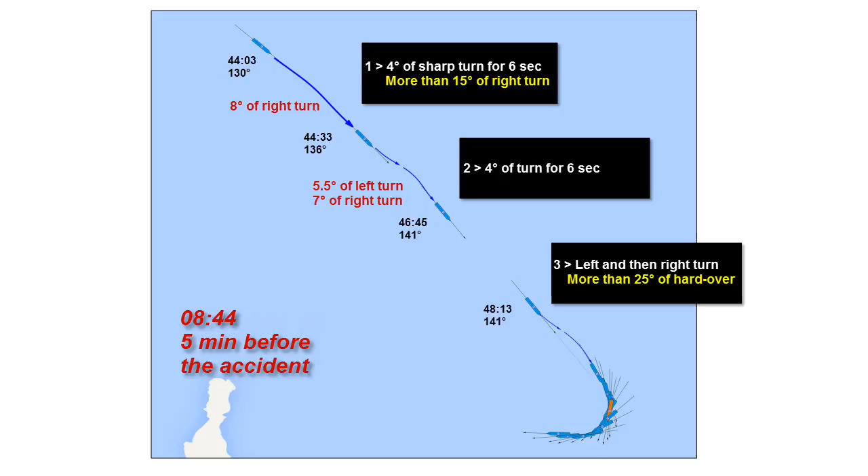For easy understanding, this picture may be expressed in another kind of picture. This is a new expression of the previous picture. As shown, Sewol Ferry turned 3 times, including the largest turn at the last. What's important in this picture is that, according to the HDG, the angles were stepwise changed as shown, but, according to the COG, the angles were sharply changed as shown.

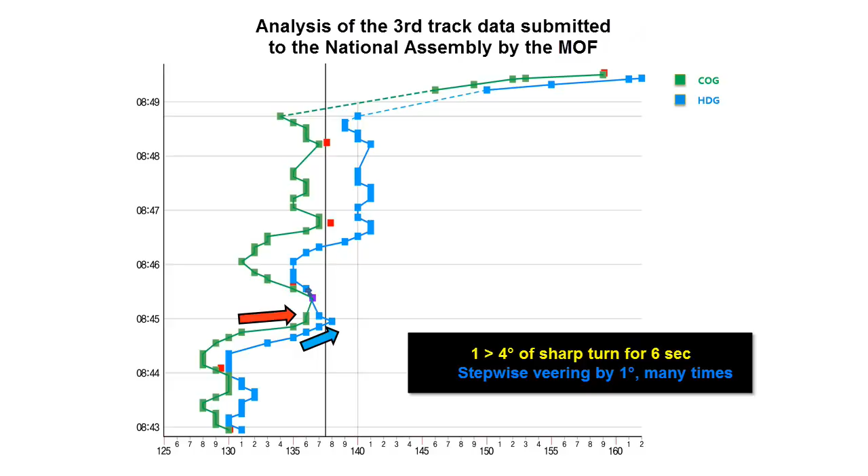The data was verified based on angles until now. However, from now on, the data will be verified based on positions. According to the data reported by the government, not only the positions of Sewol Ferry but also the time, speeds, and COG may be identified. That is, it's possible to know the duration, direction, and speed of sailing.

In the picture, white circles show expected positions of Sewol Ferry obtained by the aforesaid method. The ships in the upper part and lower part show the positions where foreign AIS information is consistent with the government's AIS information. Foreign AIS information is not dense. Therefore, I had no way but to trust the government's data, and I wanted to verify the government's data.

Yellow arrow means the section where veering was done by 4 degrees for 6 seconds. Such angle change requires veering the helm by 15 degrees at least. Blue circles mean the positions reported by the MOF. Before the sudden angle change, the positions reported by the MOF are almost the same as the expected positions, within GPS error allowance. And then, an expected position in the sharp turn section is omitted.

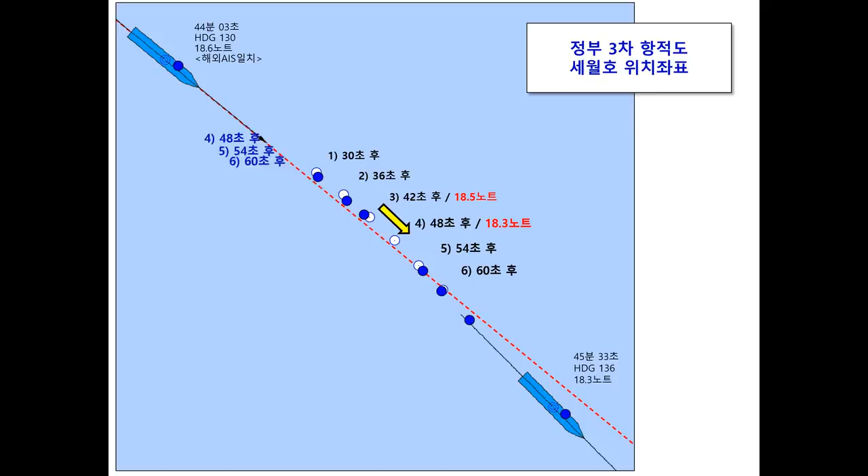As shown, 3 successive positions are concurrently shifted downward. As the result, she had to sail 134 meters between positions 3 and 4 in 6 seconds and had to sail 226 meters between position 6 and the lower ship position in 30 seconds.

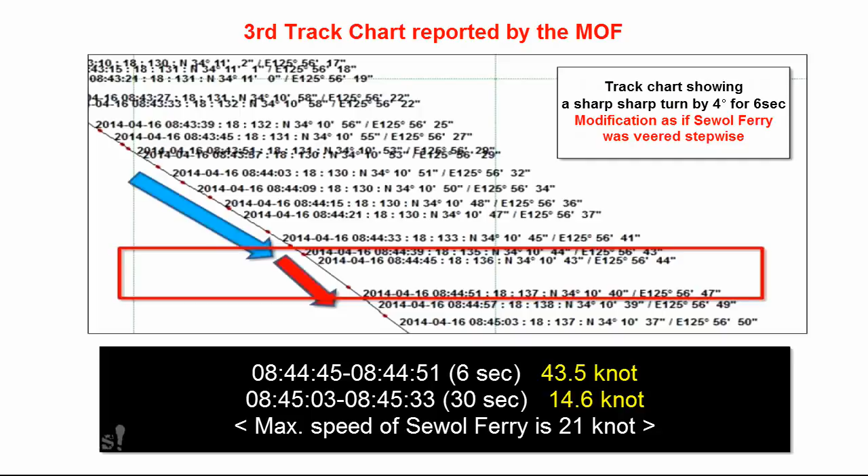As shown, the maximum speed of Sewol Ferry was 21 knots, but she showed a miracle speed of 43.5 knots and then a speed of 14.6 knots. In fact, it's impossible to reduce the speed from 43.5 knots to 14.6 knots in such a short time.

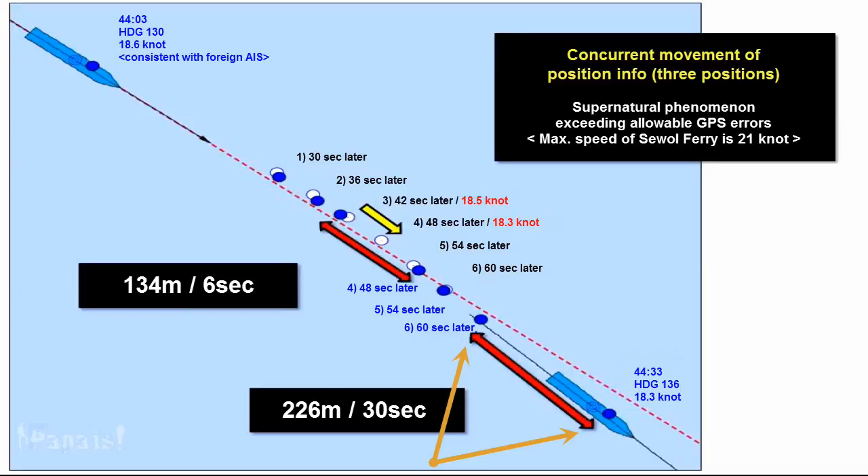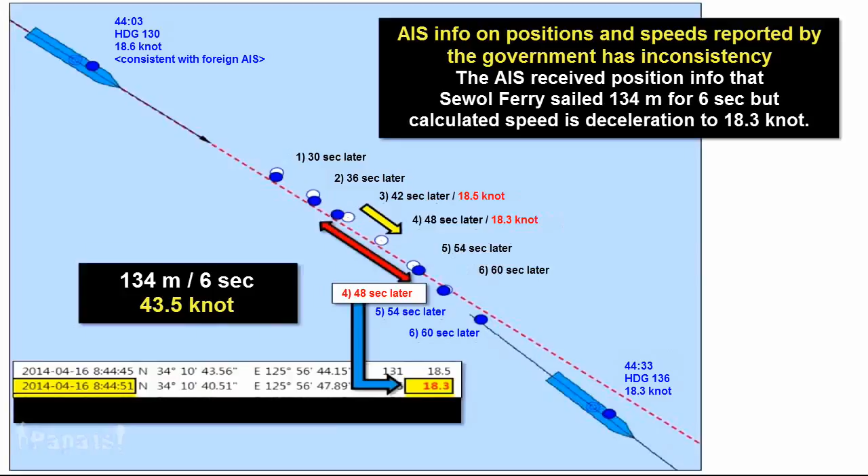As the 3 positions were concurrently shifted, the distance of this section is increased but the distance of this section is reduced. As shown, when such 3 positions are shifted downward, the distance is increased and the sharp turn becomes smooth. As AIS has no ability to consider abnormal information, it has no way but to generate an irrational speed to meet such information. This irrational speed is not related to GPS errors.

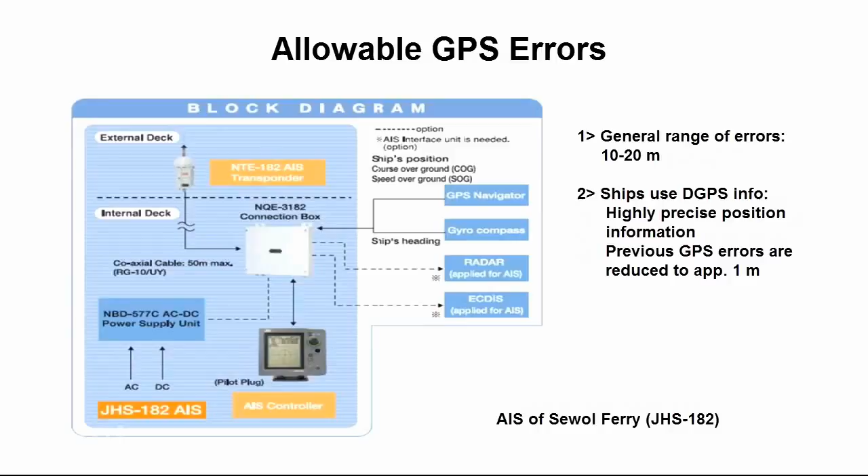When considering the track of UPLI, satellites were transmitting proper GPS data to UPLI. Furthermore, in the case of a ship, GPS errors cannot be so large. GPS errors of a ship do not exceed 1 meter.

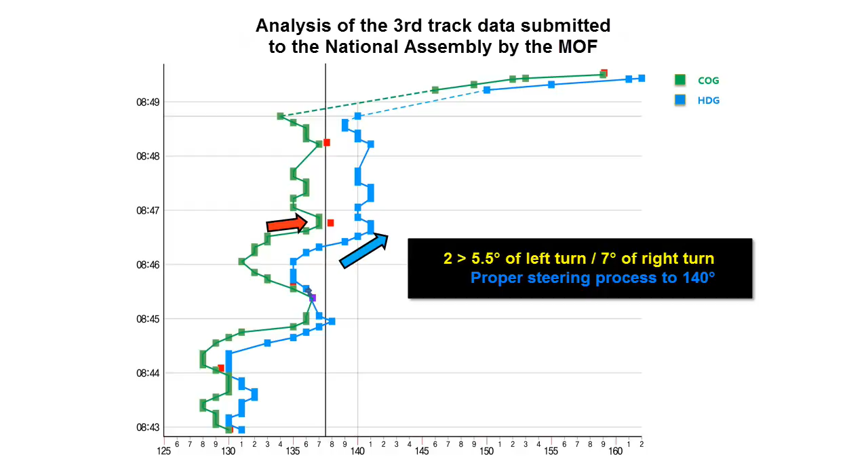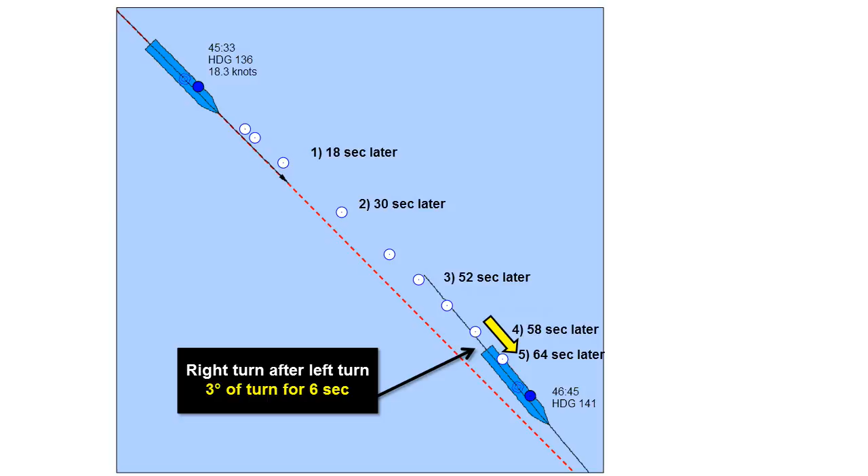This is a second suspicious section. As shown, HDG data shows small turns but COG shows large turns. The first 3 expected positions are consistent with the positions reported by the government, but position 4 reported by the government contacts expected position 3 as shown. This kind of phenomenon repeatedly appears in the sections suspected of sharp turns.

Let's see the next step. As shown, there is an empty expected position. This is a section that is suspected to have a large turn.

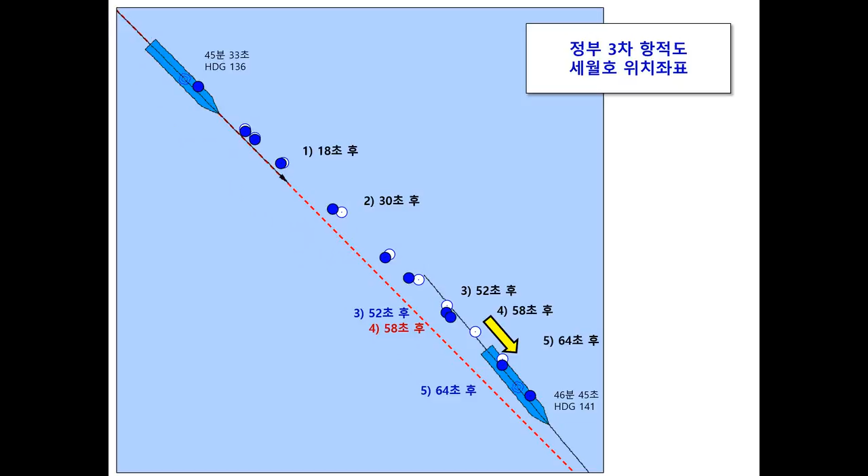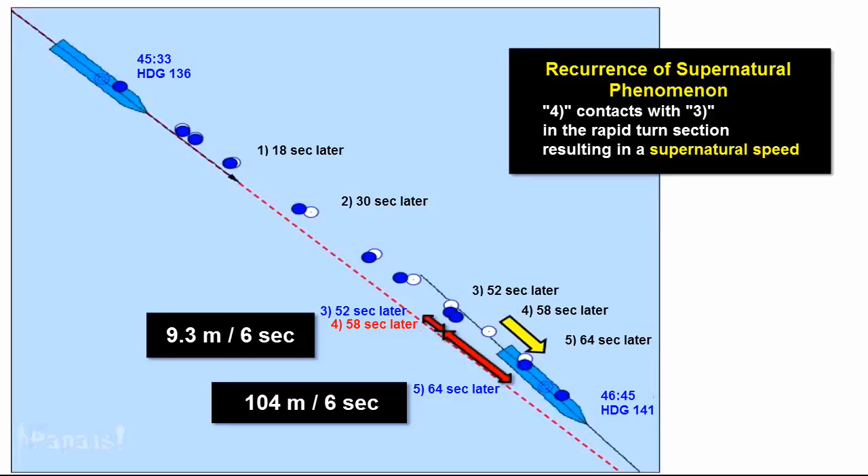The position for 4:58 seconds later contacts with the expected position of 3:52 seconds later. As shown, Sewol Ferry sailed 9.3 meters for 6 seconds and then sailed 104 meters for the same 6 seconds. The speeds are irrationally changed as shown in the suspicious sections as if the data protects the crew.

Therefore, same kind of irrational speeds are obtained again. As the result, a sharp turn becomes smooth by the same method. This is the analysis result of the tracks reported by the MOF. In relation to 29 seconds of data loss section, the crew asserts that they veered the helm during straight sailing from 140 degrees to 150 degrees by a proper method, just before the accident.

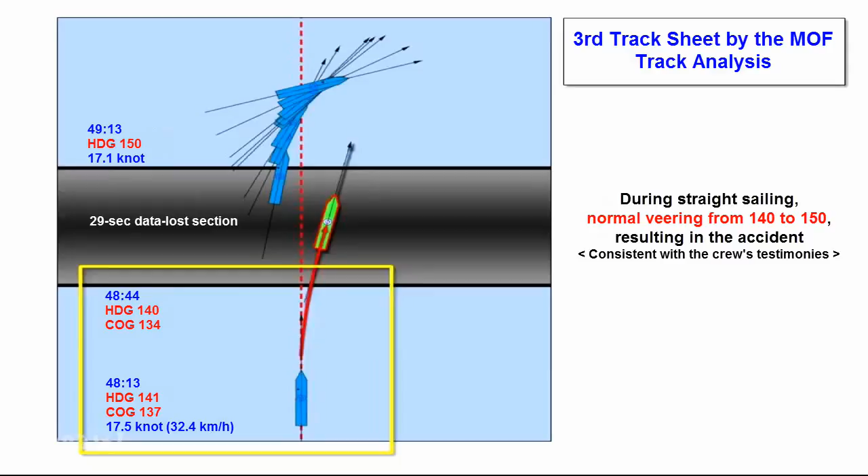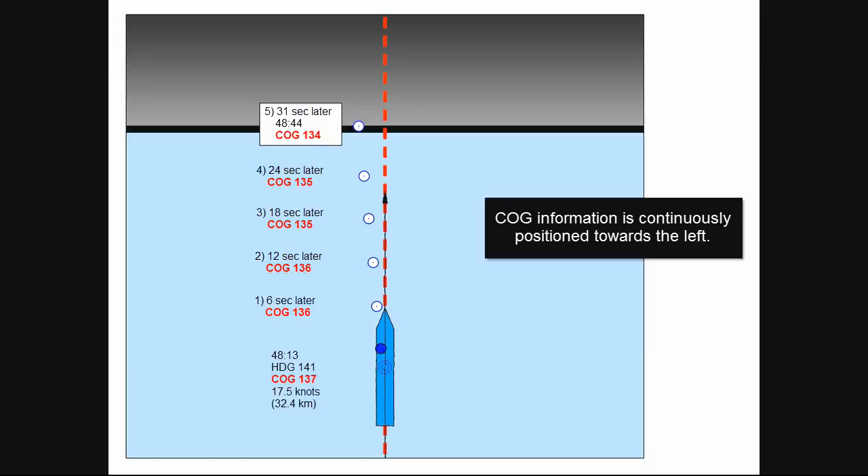Let's look at this yellow rectangular section carefully. COG shows that Sewol Ferry sailed to the left like the expected positions in the picture. The first 3 positions are located similar with expected positions although they are somewhat lower. And then, next 2 positions appear but a position is quite different from expected corresponding position.

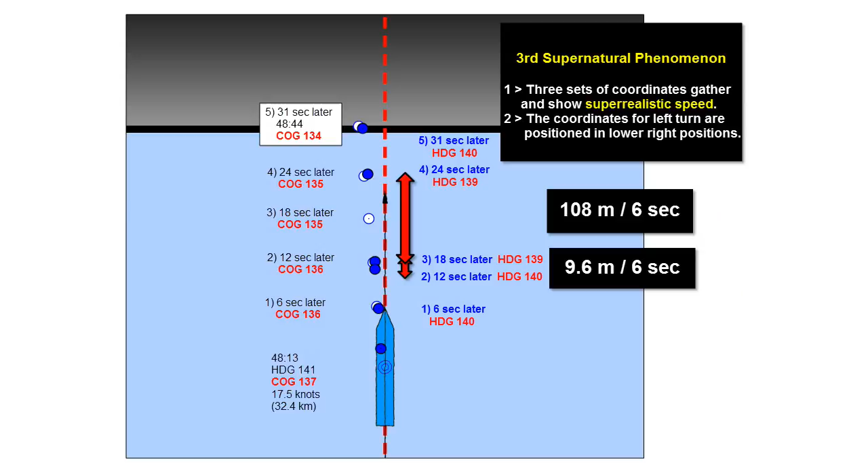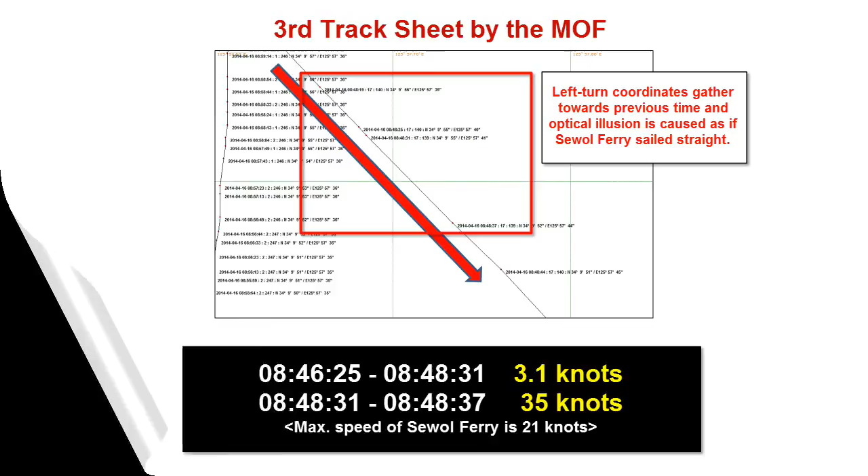Therefore, Sewol Ferry had to sail 9.6 meters for 6 seconds and then 108 meters for the same 6 seconds. As shown, 3.1 knots of speed appears and then 35 knots of speed appear, due to aforesaid shift of positions, resulting in optical illusion that Sewol Ferry sailed almost straight. Therefore, it is suspected that somebody might move the positions intentionally. Sailors do not accelerate a ship when veering the helm.

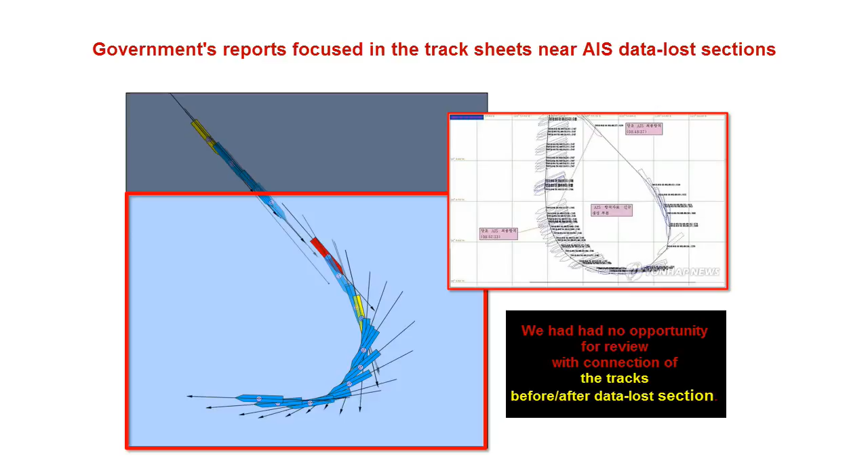The reports made by the governments are mostly focused in the section on which AIS information is unavailable. Therefore, we had no opportunity to review the sections before and after the data loss section. The data on this point and this point are available in foreign data. As the information on the time is available, the speed was obtained and was 18.3 knots.

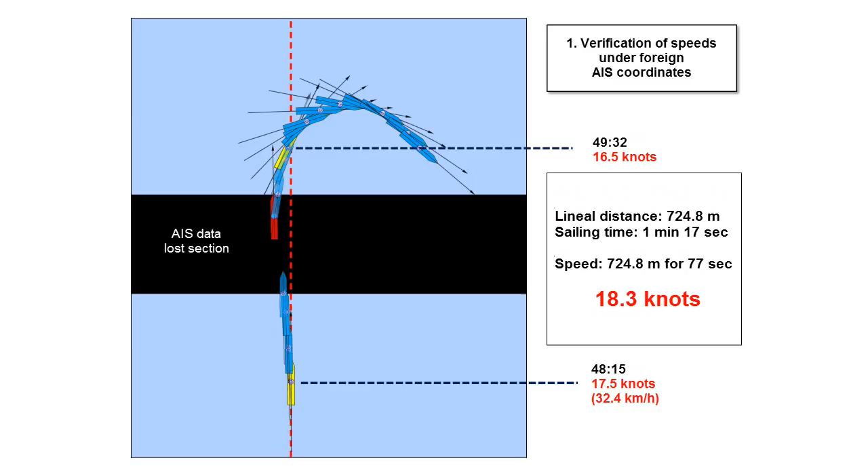However, according to the report by the MOF, Sewol Ferry sailed at 17.5 knots and then 16.5 knots at these 2 positions, respectively. If true, Sewol Ferry might be accelerated for a while in this section. Therefore, I identified the positions based on Jindo VTS data, but this data did not give me the information in detail. The information was available every 20 seconds.

Anyway, Jindo VTS data showed about 17.6 knots of speed in about 725 meters of section for 80 seconds. Jindo VTS data showed the evidence of acceleration, too. The MOF reported the tracks in the most detail. As shown, about 18.3 knots of speed appears, too. When considering the report by the MOF, about 21 knots of speed is required in data loss section.

However, sailors say that such rapid acceleration and deceleration isn't possible for a 6,000-ton ship like Sewol Ferry in as short as 29 seconds of section. This is the final track sheet reported by the MOF. This picture shows the time before and after the report made by the MOF. The MOF corrected the time with maintenance of previously reported coordinates, saying that the temporal differences in the time to send and receive information were corrected.

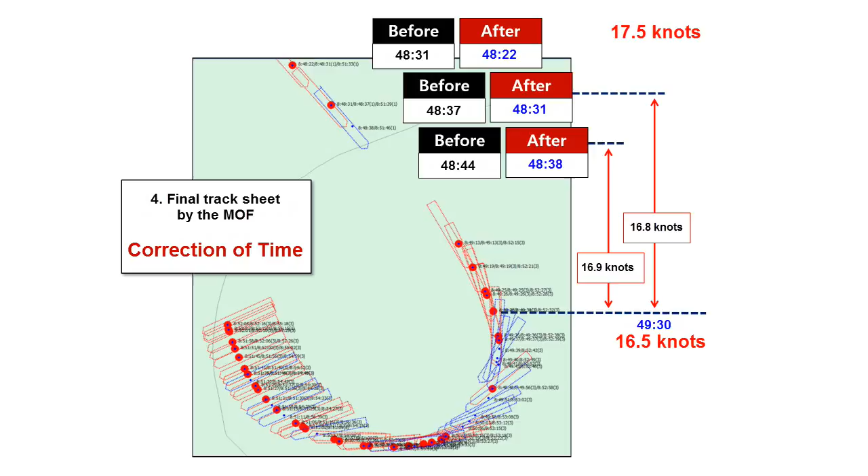A sailor said during an interview that no ship is accelerated during veering the helm, that the speed may be reduced rather than increasing, and that the crew of Sewol Ferry should be investigated to identify the reason for acceleration. Nevertheless, it's not clear whether the prosecutor and police will investigate the crew to identify this issue.